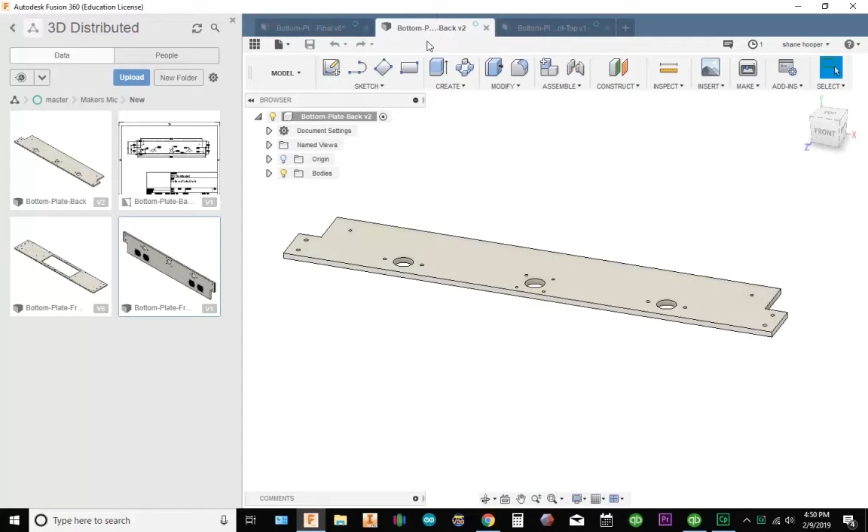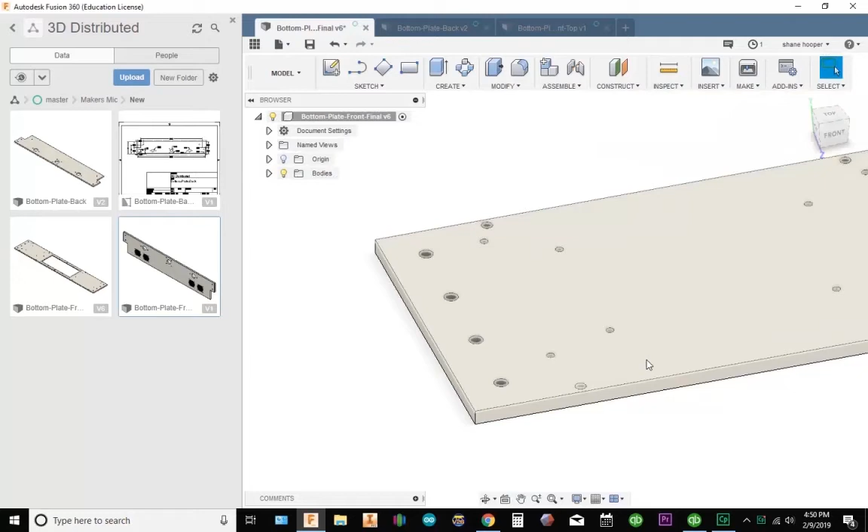Okay, so we have the bottom plate, the bottom plate back, and the bottom plate top. This family of parts all uses the same stock material. The stock is going to be 200 thousandths thick by 4 inches wide. So you've got 4 inches, and the length of each one is going to be 22.5 inches, finishing up at 22.263.

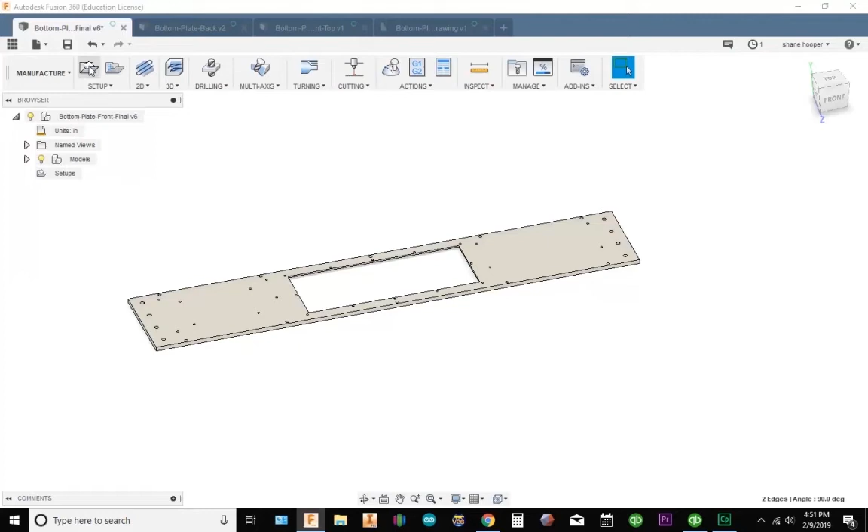First thing I'm going to do is go over to manufacture, and go to setup. I'm going to go ahead and set up my stock. I have offset side and offset top. Offset side, I'm going to do 0, and stock top 0.

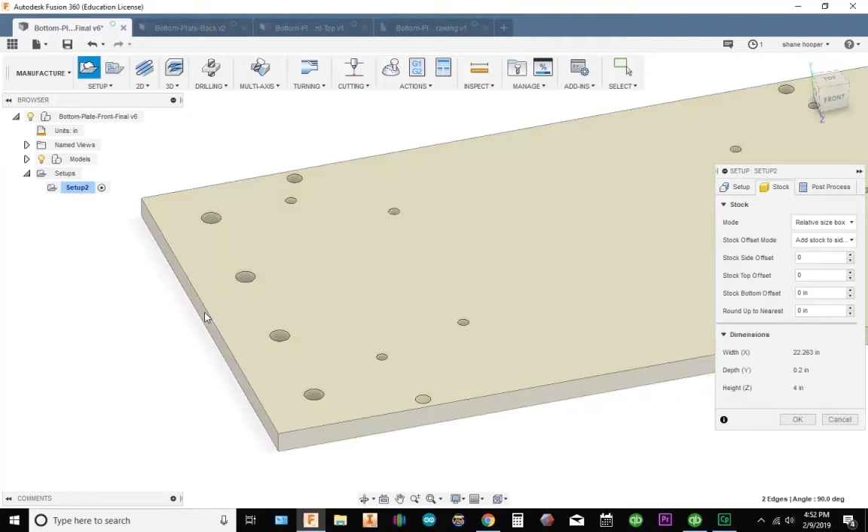Now there is going to be some stock right here that hangs off, but I'm not going to worry about that. What I'm going to do is set up my model orientation. I'm going to select my Z-axis, so I come over here, click this check mark, click on top. Then I'm going to select my X-axis, right here.

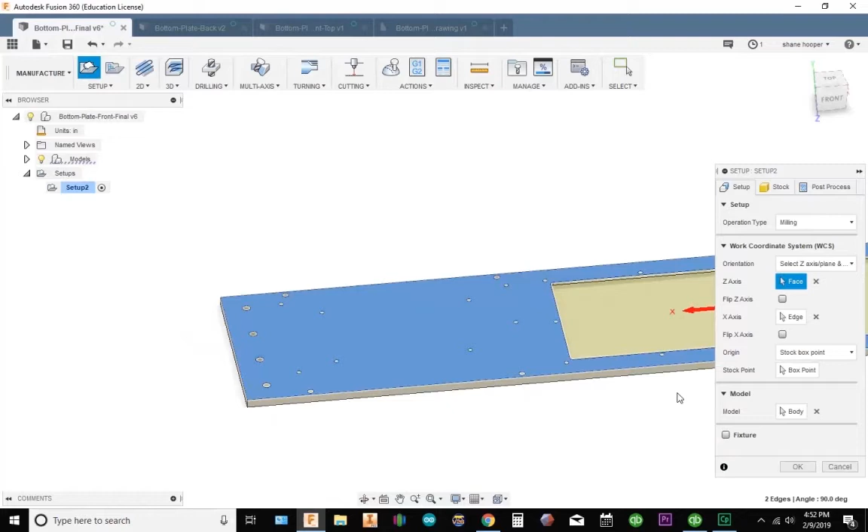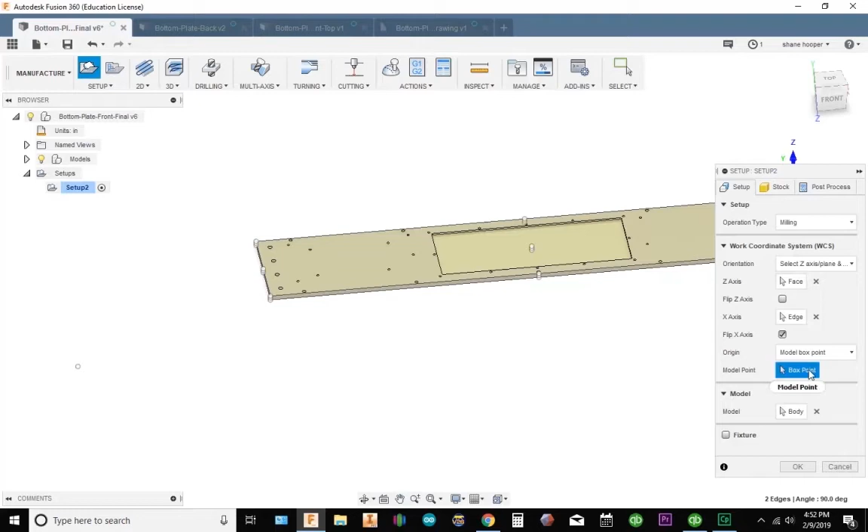Next thing I'm going to do is select my origin. I'm going to do a box point, model box point, and select right here for my origin. Now I want my X going to the right, so I'm going to come over here to flip X and check it. Now when I did that, it moved my origin over to this corner, so I'm going to go ahead and reselect my model box point and put it right here. Let's go ahead and click OK.

I'm going to rename my setup Op1, and first thing I'm going to do is a 2D contour on this side, and then do a 2D contour on this side.

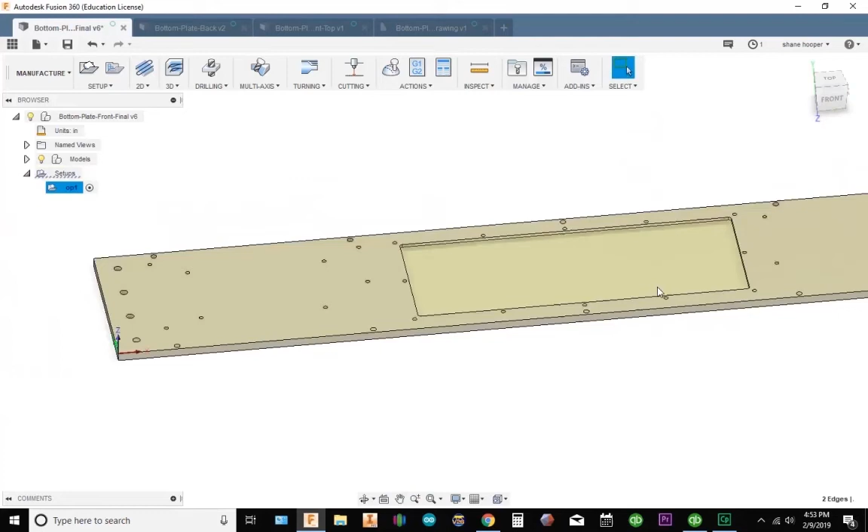So let's go ahead and start with our left 2D contour. I'm going to go 2D, 2D contour, and when I hover to select the side, it wants to select the whole perimeter of the part. So I'm going to hold my Alt key down, which will let me select just this one area.

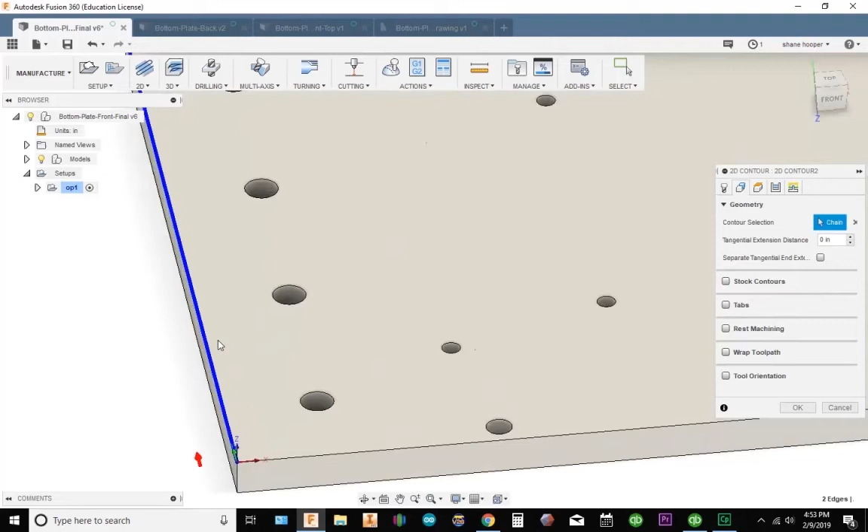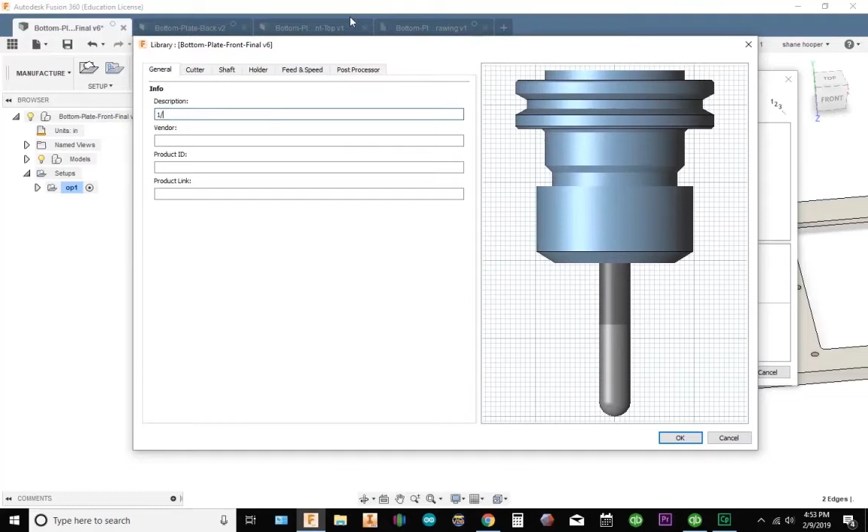Now I'm going to go ahead and set up my tool. I'm going to use a 1/2 inch end mill, so I'm going to go to my tool and create a 1/2 inch end mill. I'll make this tool 1, name it 1/2 inch end mill. I'm going to go to cutter, select flat end mill, and in diameter type in 0.5.

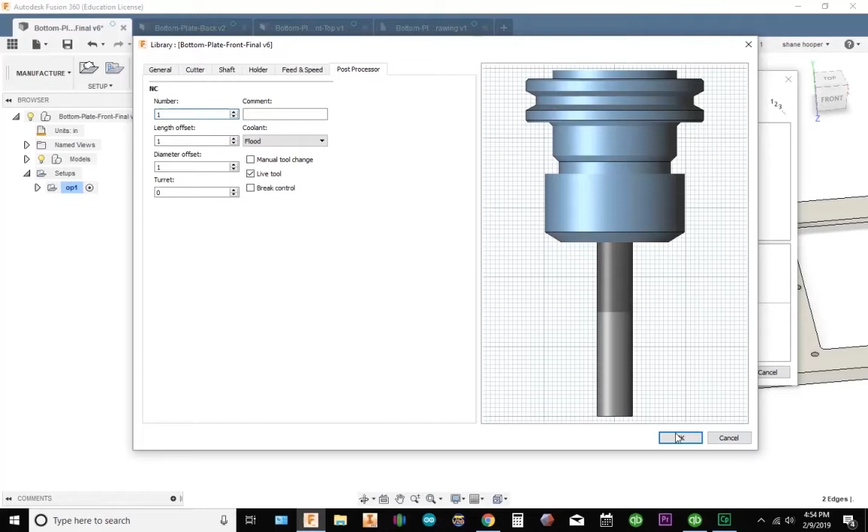Shaft and holder I'm not too worried about. Speeds and feeds, I'm going to go 1500 RPM at 15 inches a minute. Now I could go faster, but I'm going to start off at 15 just because it's one piece. My plunge rate, we'll go ahead and leave it at 5. Post processor, tool 1, sounds good. So I'm going to hit OK, and select this 1/2 inch end mill.

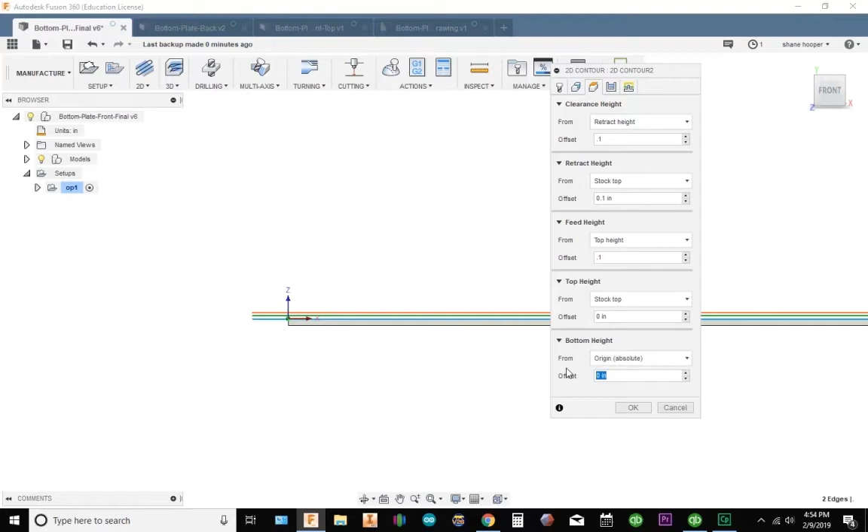Then I'm going to go to my heights. I'm going to put this in front view, and my reach clearance height I'm going to make 0.1, retract 0.1, top height 0.1, stock top 0, and my selected contours I'm going to go to absolute and tell it to go minus 0.25.

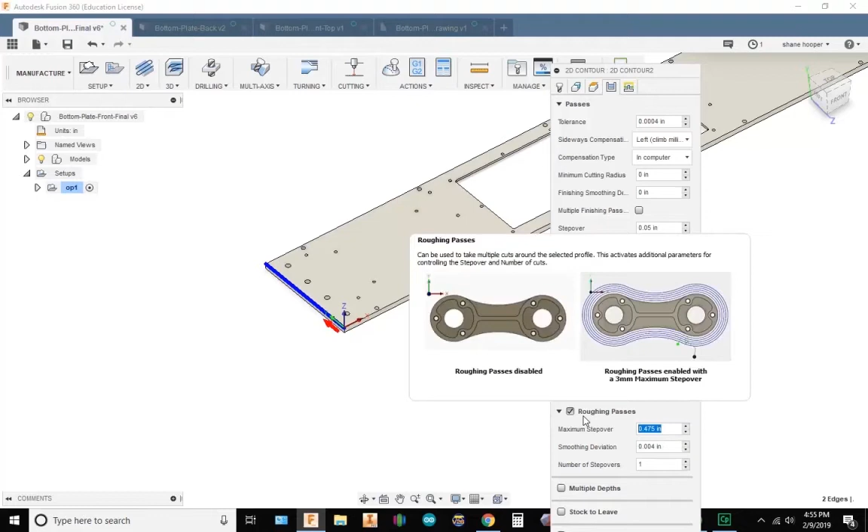I'm going to go to passes, and what I'm going to do is add in rough passes with a 50 thousandths maximum step over, and number of step overs I'm going to go 2. I'm going to go to linking, and change my sweeping angle to 180 degrees, and go ahead and hit OK.

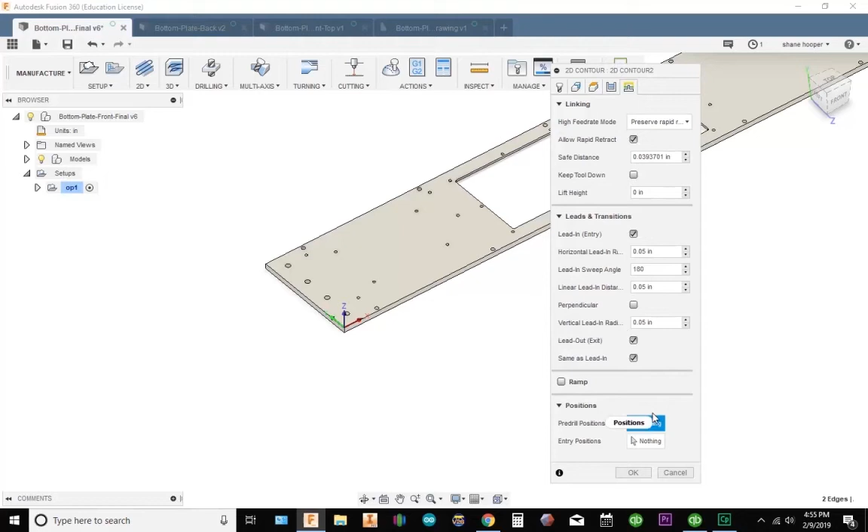Alright, so if I put it in top view, you can see that the cutter does this little radius right here before it leads in, okay? So what I'm going to do is change that.

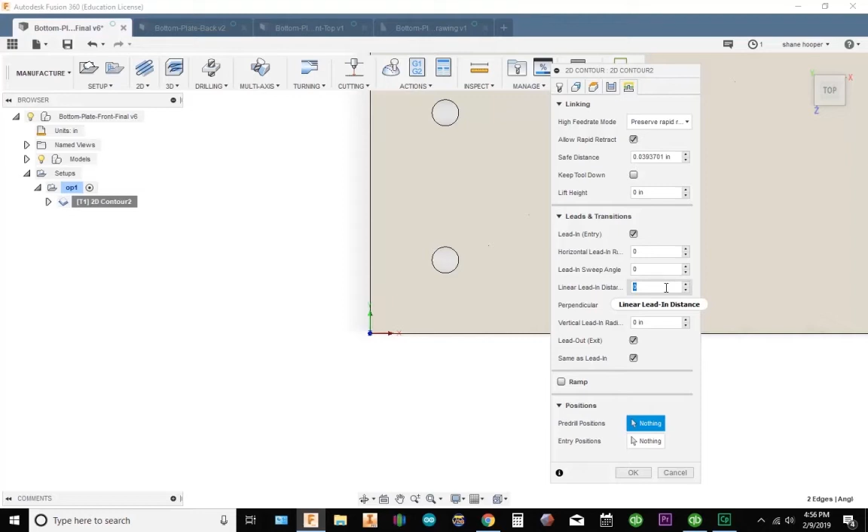I'm actually going to make this my lead-in radius at 0. Linear lead-in radius 0, I'm actually going to put this at 0 degrees. My linear lead-in distance, since I'm using the 1/2 inch end mill, I'm going to go to radius plus some, so I'll make it 0.3.

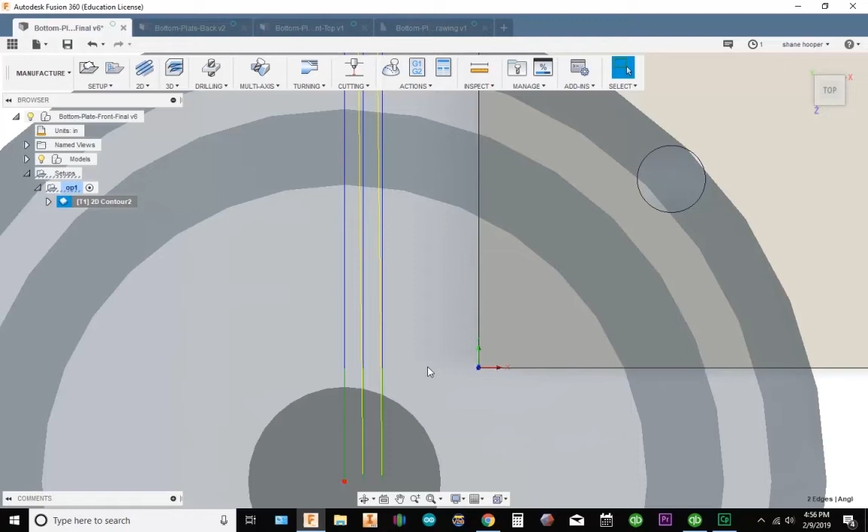So now if I zoom out, I have something that looks like this. And what I want to make sure is that this line right here, the end mill starts before where the material actually starts. Alright, so everything looks good.

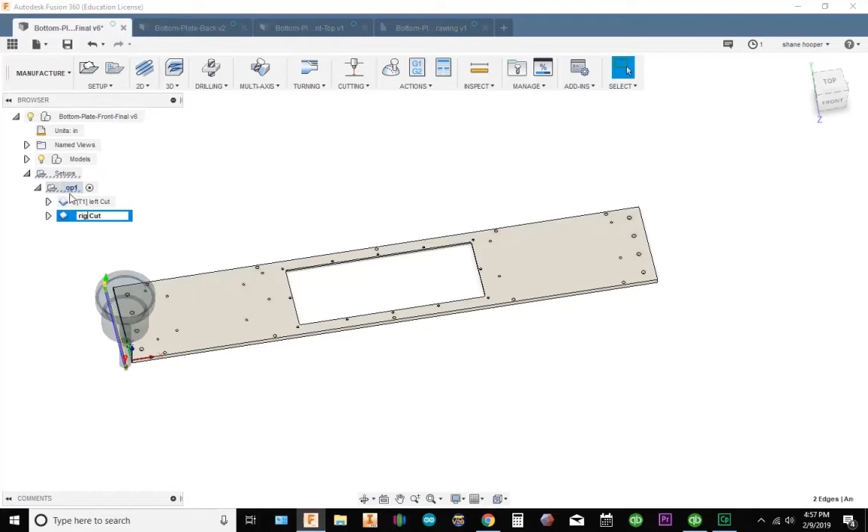I'm going to name this left cut. Now I need to go over to the other side and do the same thing. The easiest way to do this is just right click right here, go to duplicate, and I'm going to rename this right cut. So all we got to do now is edit this right cut toolpath.

I'm going to go to geometry, deselect the previous geometry, and now I'm going to hold my Alt key and select this edge right here and hit OK. So I have something that looks like this. Got my left cut, got my right cut.

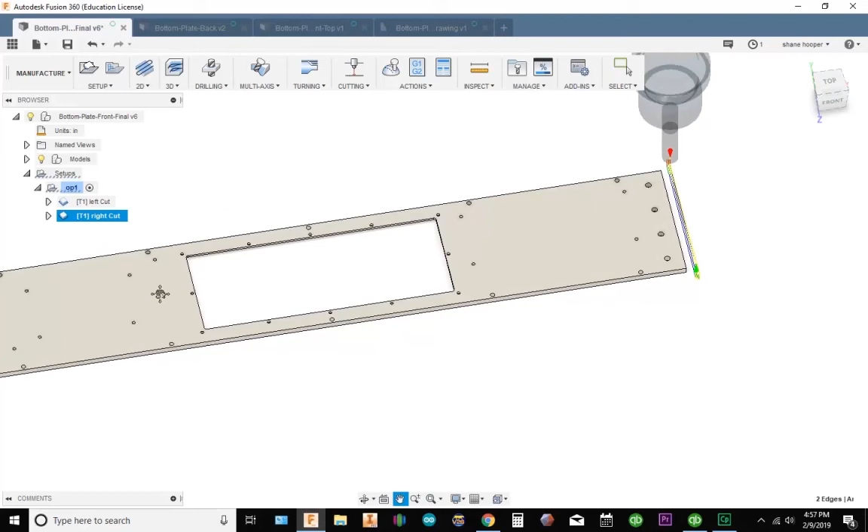Alright, so the next thing I'm going to do is cut this pocket. I think I'm going to go ahead and use a 1/4 inch end mill to cut out this pocket. Let's go ahead and save this. I'm going to use a 2D contour.

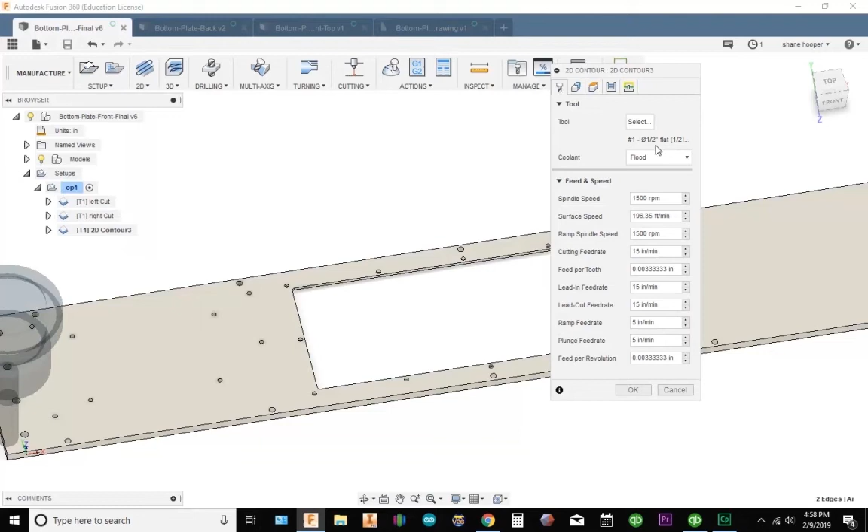So I'm going to go to Tool, create a new tool, go to the General tab. I'm going to name it 1/4 inch end mill. I'm going to go to my cutter, use a flat end mill that's 0.25 diameter. Shaft holder, not worried about.

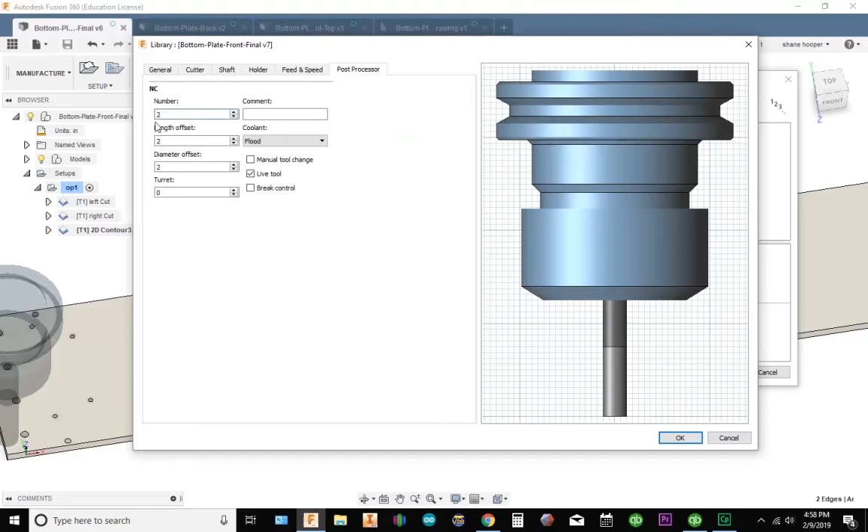Speeds and feeds, I'm going to go 3500 RPM at 15 inches a minute, and I'll leave my plunge feed rate at 5. Post processor, tool number 2, sounds good. I'm going to select OK, and hit OK again.

Now I'm going to go to my geometry tab and select this chain right here. Everything looks good. If I wanted to cut the outside, I would click on this arrow, but I don't. I want to cut the inside.

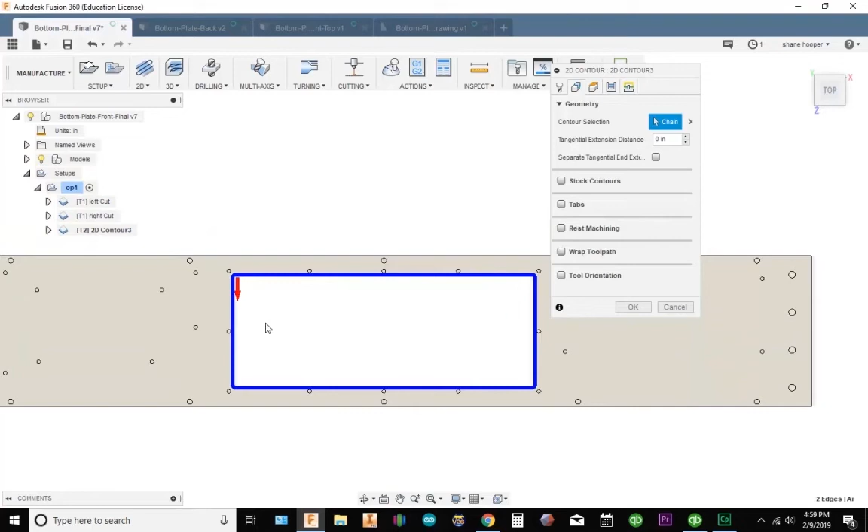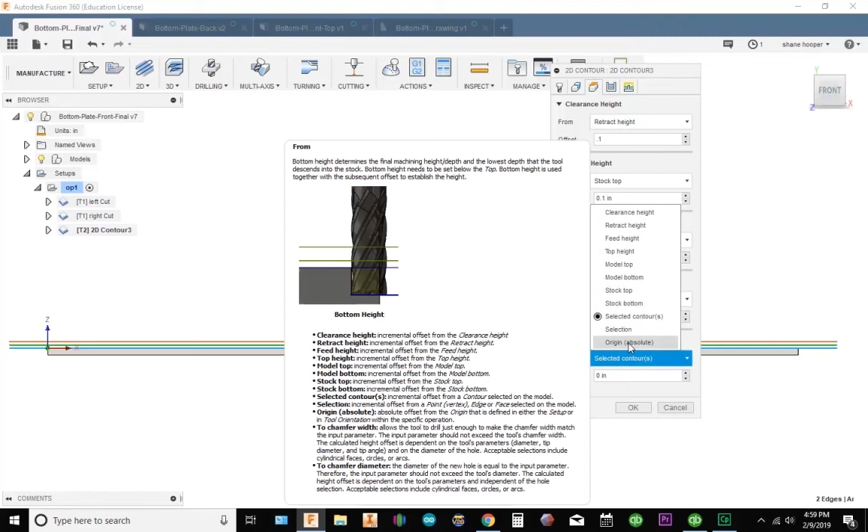Heights. Okay, I'm going to put it in front view so I can see what's going on. Retract height, I'll make 0.1, stock top 0.1, top height 0.1, stock top 0. And my bottom, I'm going to put it in absolute and go minus 0.25.

Now the plate is 200 thousandths thick, so 0.25 is an extra 50 thousandths right there. I like doing that because it ensures that if there's a radius on the end mill, it still cuts to full depth.

Alright, so number of passes, let's go ahead and put this on multiple depths, and 40 thousandths per depth of cut, sounds good.

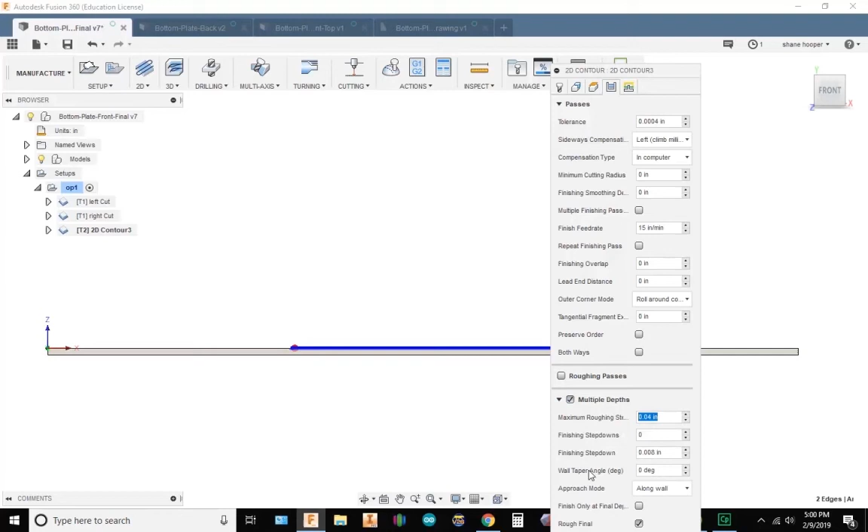Let's go to linking, horizontal lead-in radius. Let's try out 25 thousandths, I think that'll work. I'm going to hit OK. I'm just going to use it at the default settings. I don't usually do that, but I'm going to do it now.

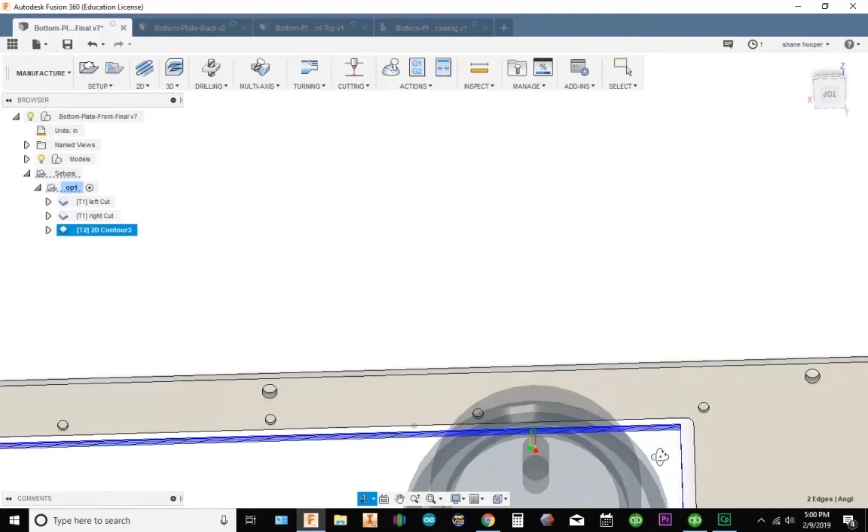Alright, so what you want to watch out for is we want to make sure the tool doesn't feed in and put any significant force on the tool that could break it. So we have this lead-in radius that the tool pretty much sweeps down and leads in at a radius. We could have problems with that.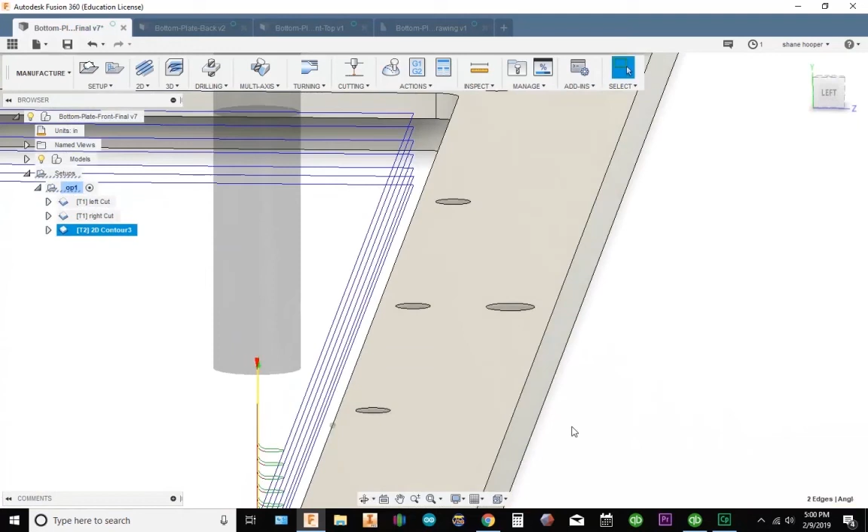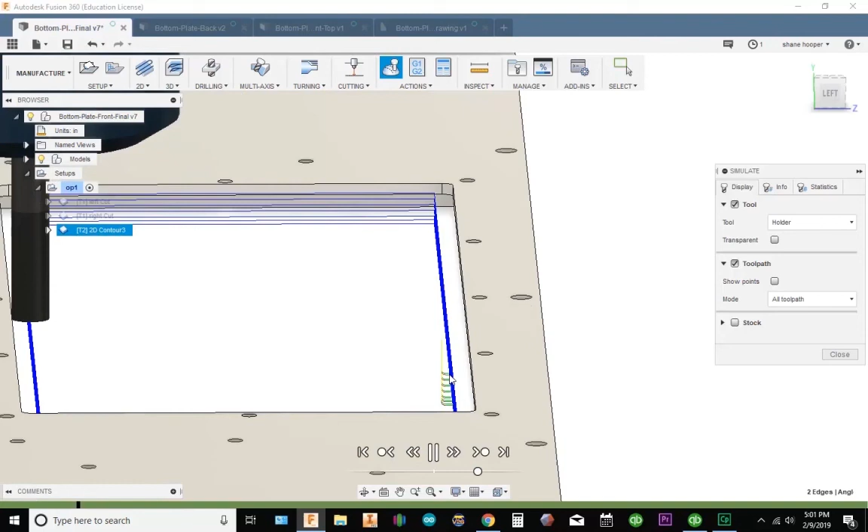I'm going to zoom in really close and simulate this. So the tool comes down, leads in at a radius to 50 thousandths depth, 40 thousandths depth of cut, and then starts taking its pass. It's going to look something like this. Comes out, backs up, leads back in.

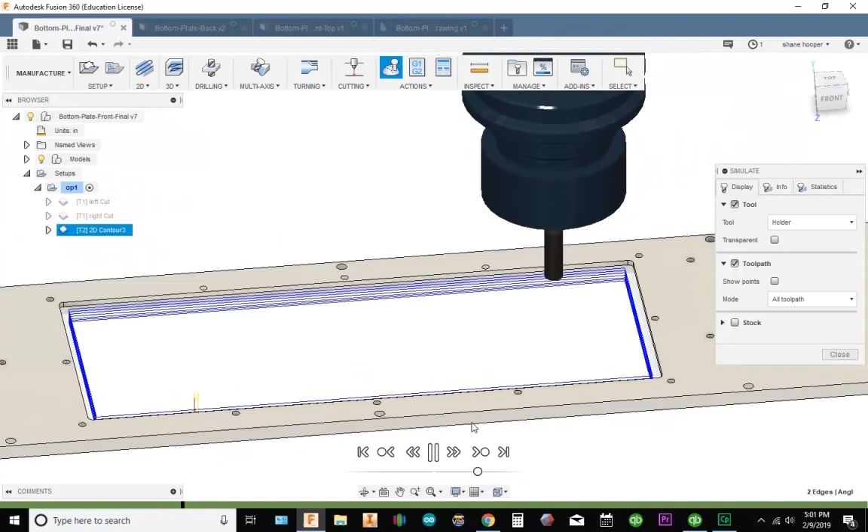And everything looks pretty good. As you can see, I'm actually going deeper than the plate actually is. That's to make sure that I actually cut through. If you go the exact distance, sometimes you'll find yourself with a really big burr.

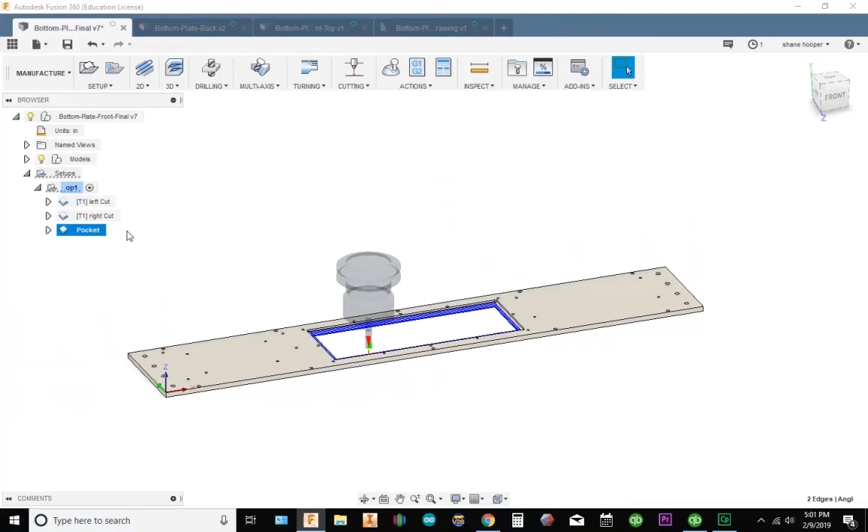Alright, so everything looks good, I'm going to close this out. I'm going to rename this operation Pocket. Let's go ahead and hit save.

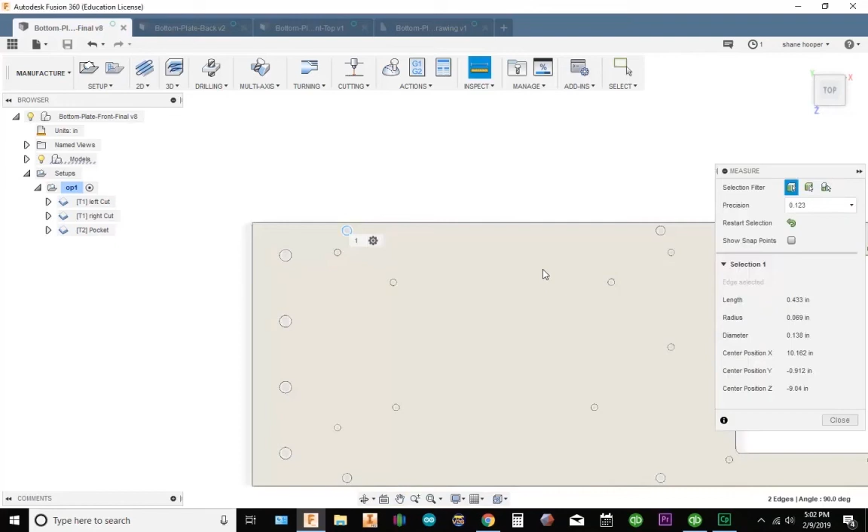Alright, so I'm going to start off by measuring these holes here. I have a diameter of 0.177 here, 0.177, and 0.138.

Now I have a bunch of these plates to make, so I'm actually going to do something weird here. Not only do I have the 3 plates I have to make for the Maker Mike show, but also I have a handful of plates that use the same stock material to make for myself.

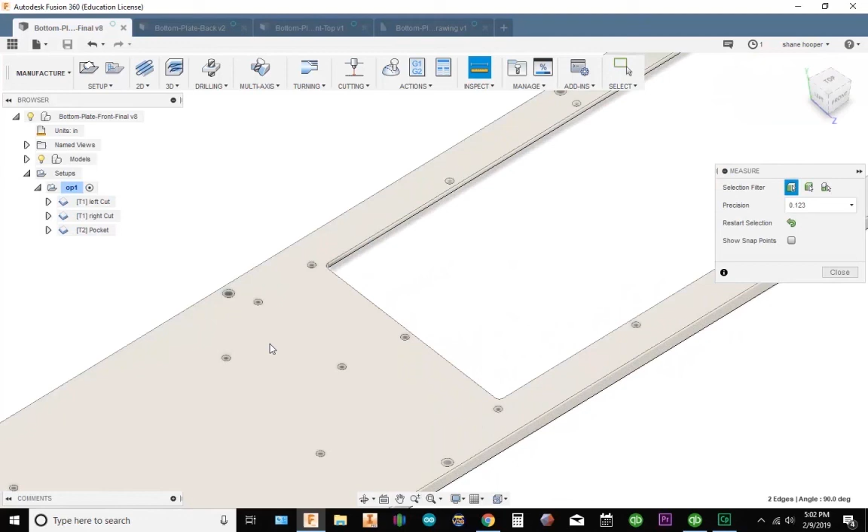Now, one thing, each one of these plates has a wide range of different drills. So I'm going to do something weird I don't usually do. I'm actually just going to drill each hole with the smallest diameter, and then come back to the drill press and actually drill it out to size.

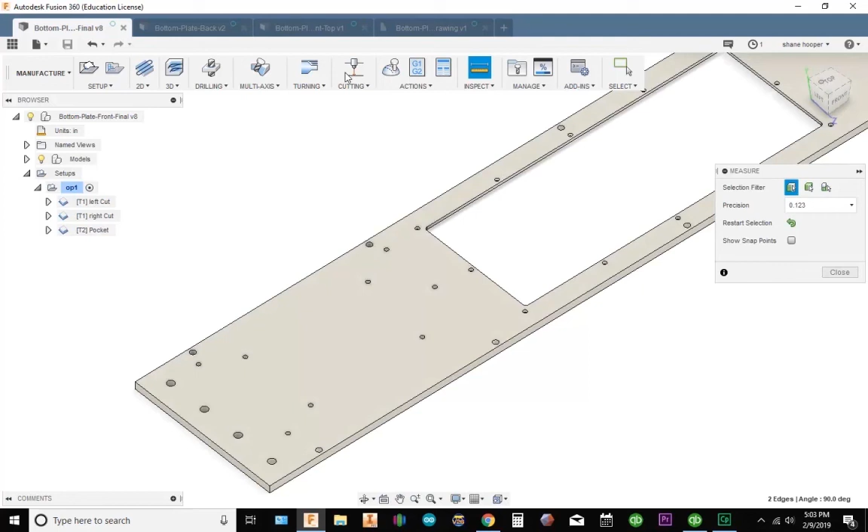Now the reason why I'm doing that is because I have a bunch of plates to make that use a wide range of drills. My setup process could take a long time. So what I'm going to do is find the smallest drilled hole, which should be 98 thousandths diameter.

And I'm just going to drill a 98 thousandths hole through each one of these, and then rechase everything on the drill press. That's because I have to make one of each. I actually have like 10 different plates I have to make. This is just one size.

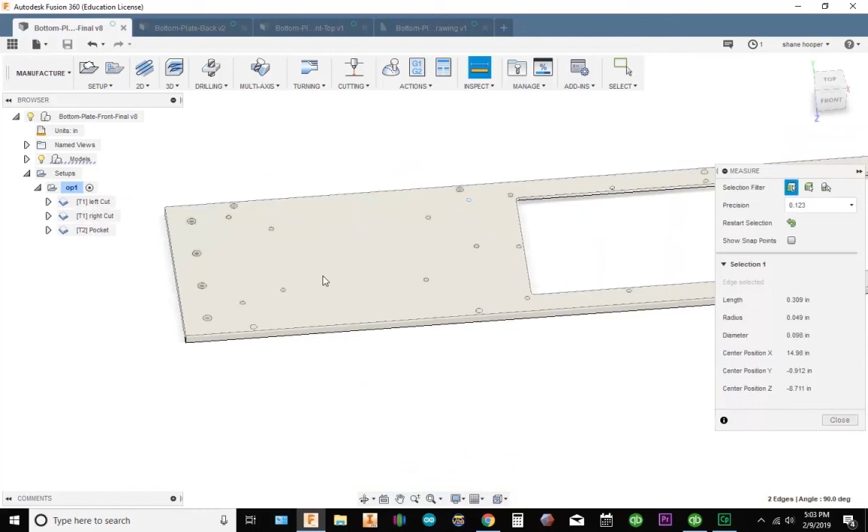If I wanted to set each tool, my programming time and my setup time and operation time would drastically increase. So I'm trying to make things easier for myself, and I'm just going to cut everything at 98 thousandths. Then on the drill press, rechase everything to the right diameter. It's a lot faster that way.

Now, if I was running 5 or more pieces, I would do it differently. But in this case, it's one of each, and my setup time is going to increase with all these different hole sizes.

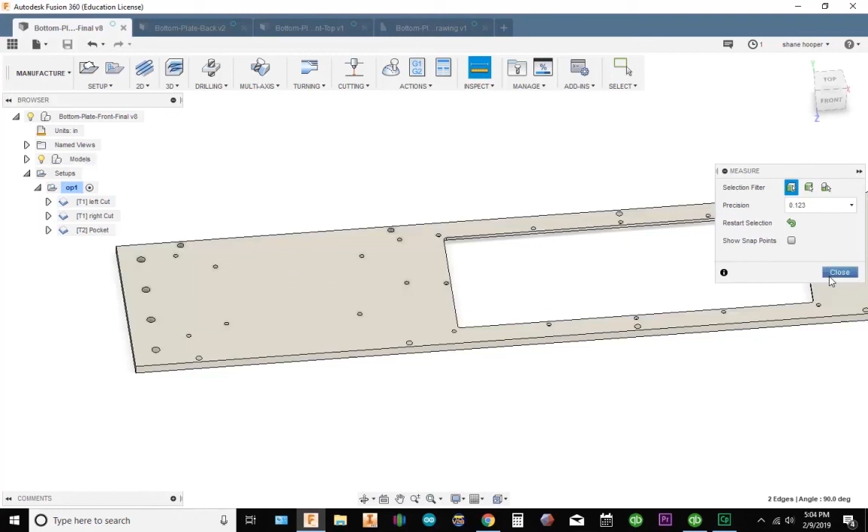So let's close this out. What I'm going to do is go to drill, select my tool, and create a center drill.

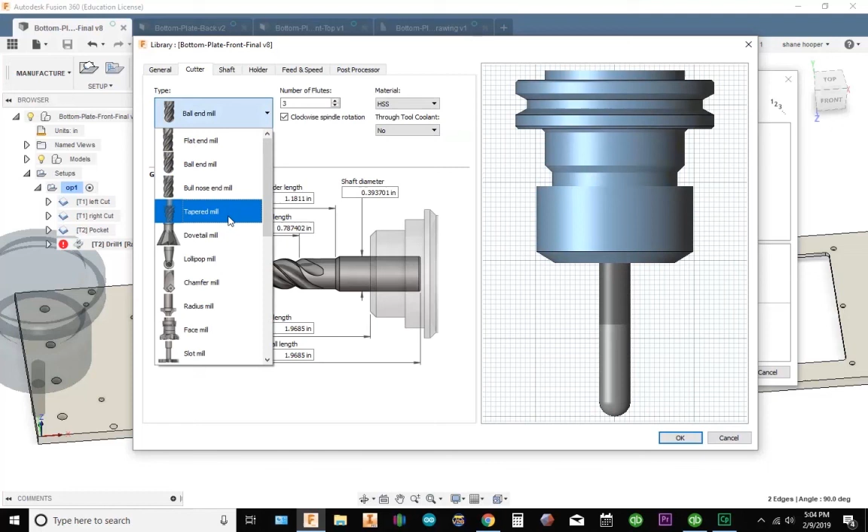Center drill. I'm going to select my cutter, it's going to be center drill. My diameter right here is going to be 0.125, and my diameter of my body is going to be 0.25.

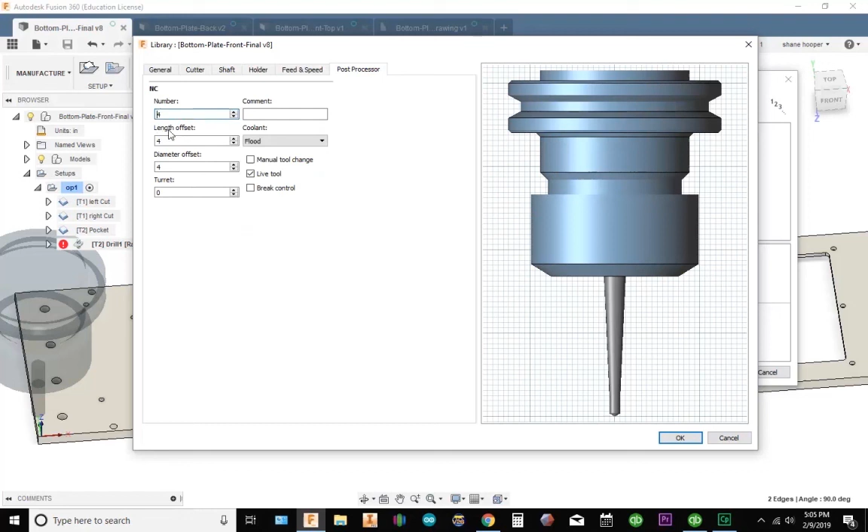Feeds and speeds, I'm going to go 1200 RPM at 4 inches per minute. My plunge feed rate, 4 inches. Post processor, let's make this tool number 3. And I'm going to hit OK.

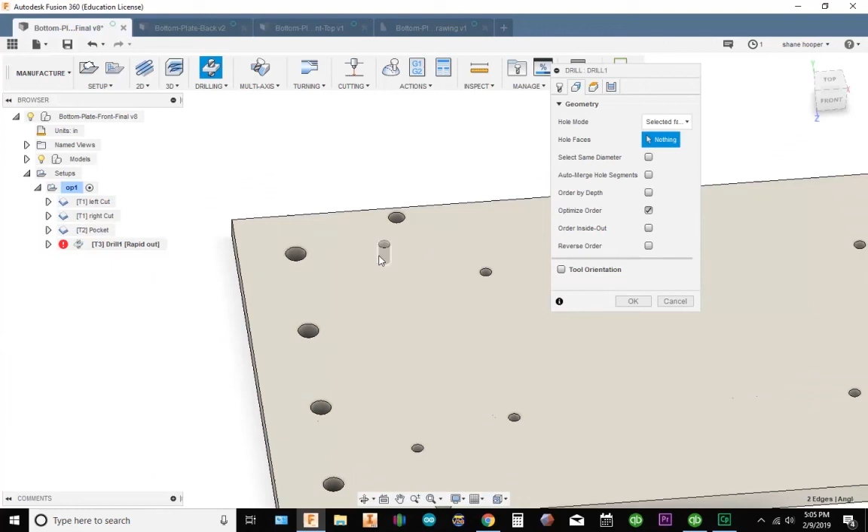Let's go to geometry, and I'm going to select each one of these holes. Now I want to do it in an order that makes sense, where the tool doesn't have to travel here and go way over to this hole. So I'm going to do these just right in line, selecting each one of these holes right in line.